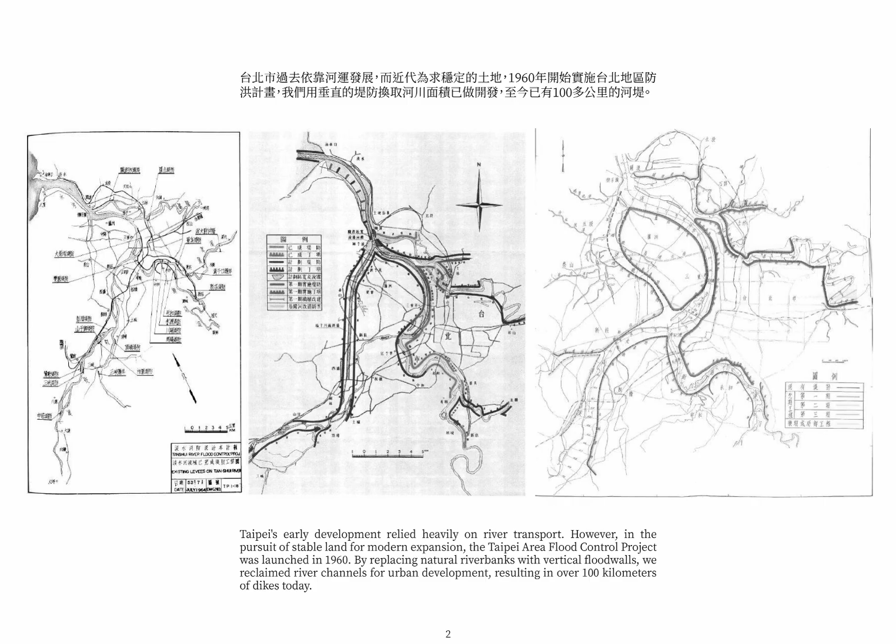Taipei once grew through river transport, but to ensure modern development, flood control plans were implemented, trading river space for land by building concrete walls. Today, these levees stretch for a continuous 100 kilometers. Tamed into mere infrastructure, the river has become the city's blue backdrop. Is it still a living, flowing body of water?

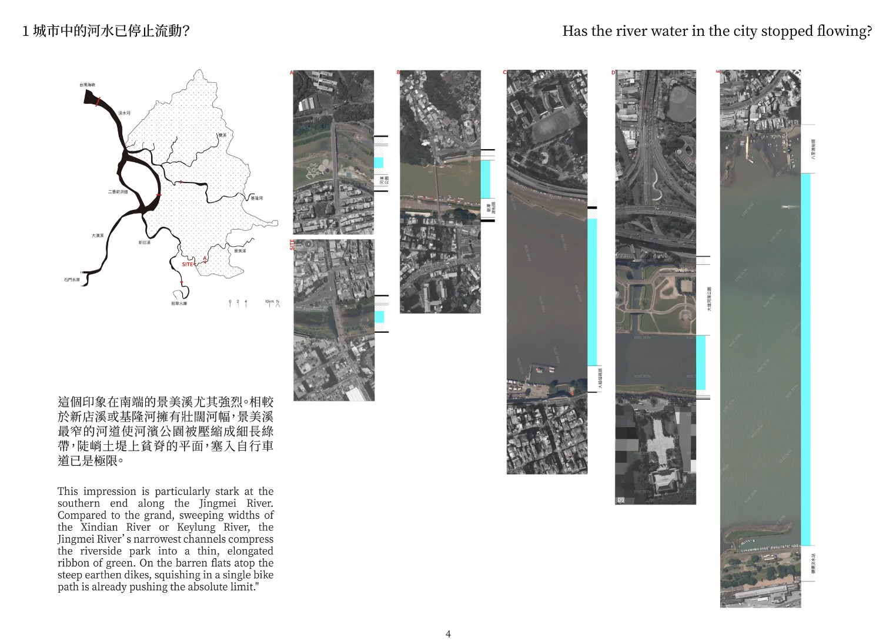This impression is especially sharp in southern Taipei, where a cycling path is forced along the narrow, steep edge of the river. Yet, because this is upstream, the river and community are small in scale. The dense floodgates and pumping stations amplify the structural volume, localizing a grand display of human power over nature.

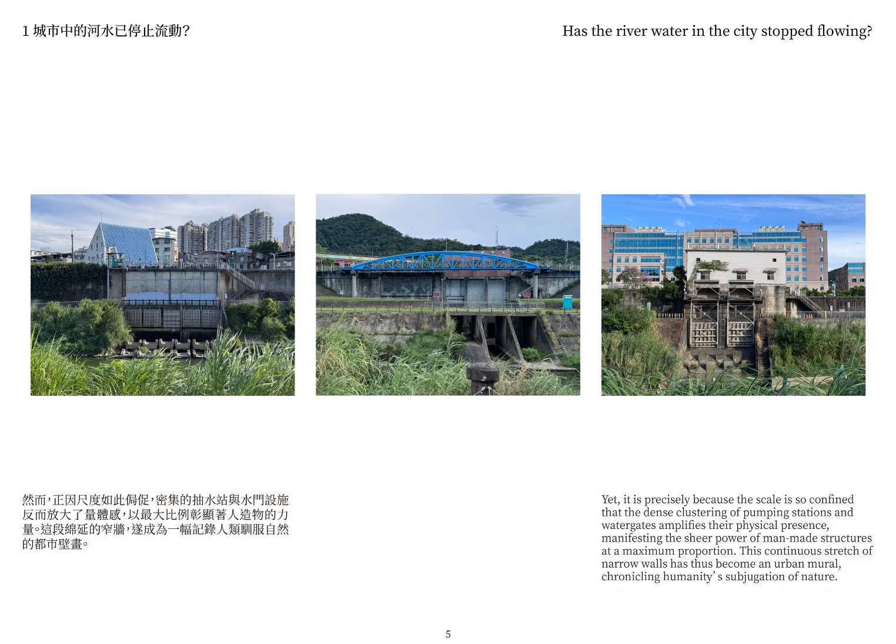They serve as openings in the high walls that separate city from river, yet they are also the most direct proof of how the city's water actually moves and breathes.

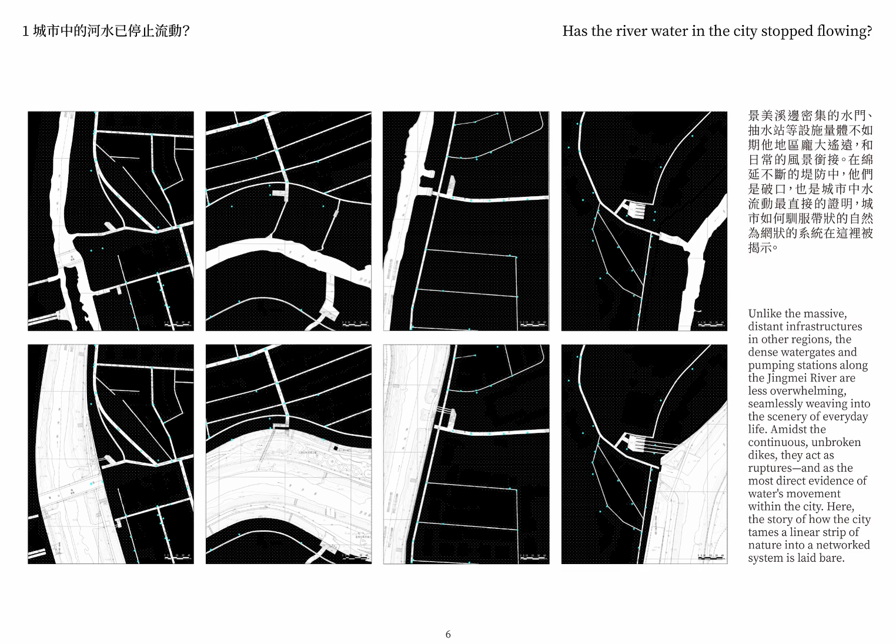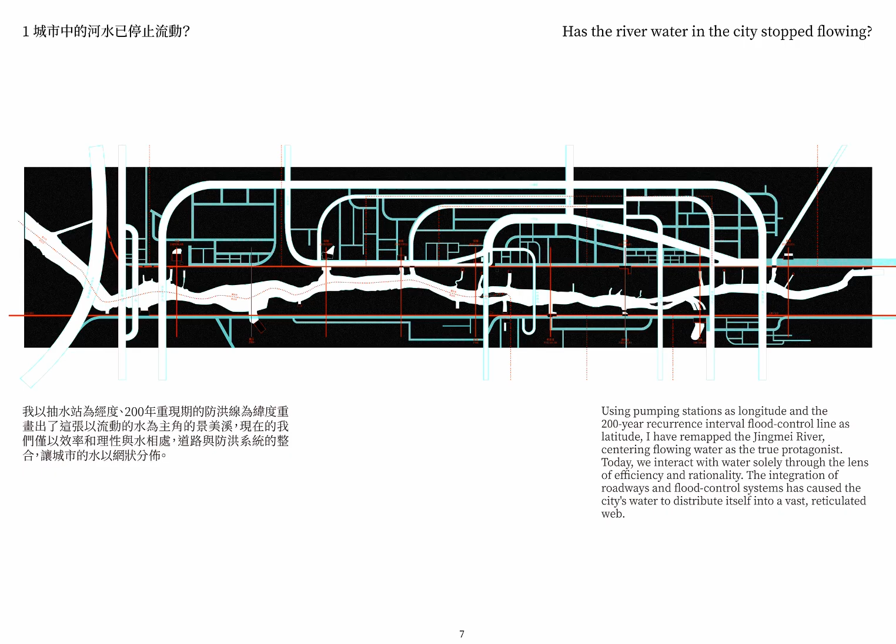Using water facilities as our new coordinates, I remapped the Jingmei River with flow as the main character. Today, we interact with water purely through the lens of reason, where roads and flood control systems intertwine. The city's water is no longer just a surface line, but a complex, interconnected web of processes.

Lifting our perspective to the Earth's surface, we see how temples that once protected this land used to face the river. After the levees were built, they retreated behind the flood defense lines, leaving behind rituals and daily life. My chosen site holds the protective measures of both eras.

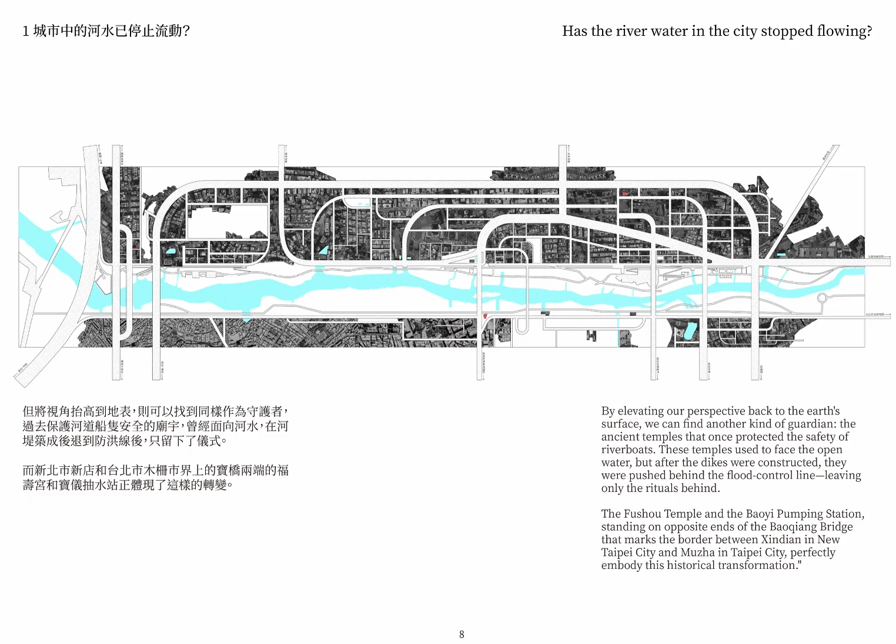The site bridges a residential area to the east and an industrial zone to the west. On the east, a pumping station is cut off from the community by a highway, leaving a void between the levee and the city. On the west sits another pumping station and an earth god temple.

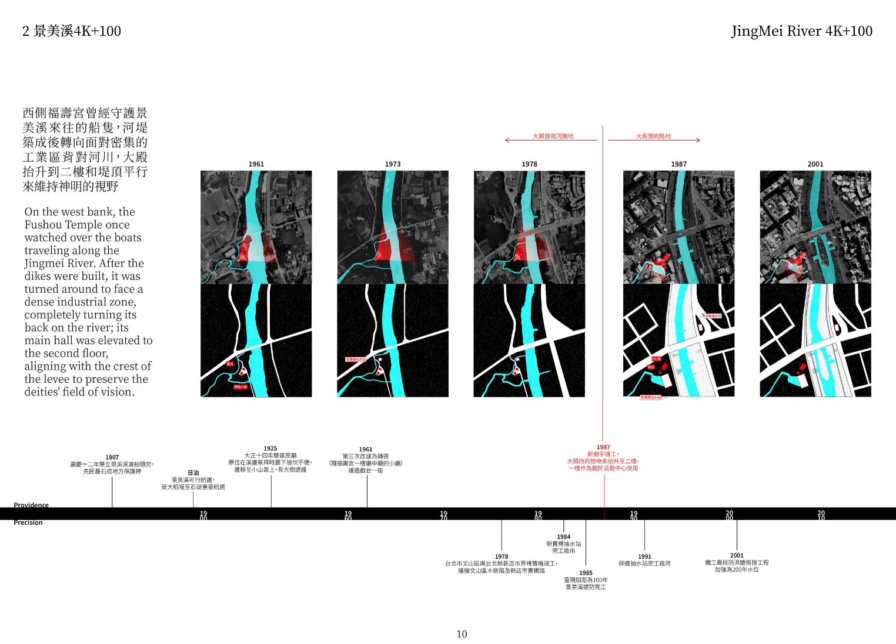The temple on the west once guarded passing boats and protected the land behind from floods, but after the concrete walls went up, it turned 180 degrees, turning its back on the river.

Across the city, riverbanks are treated exactly the same, regardless of location or width. On the steep embankment of my site, city roads, bike paths, and floodgates each occupy a single elevation, leaving our view forever trapped at the exact same height.

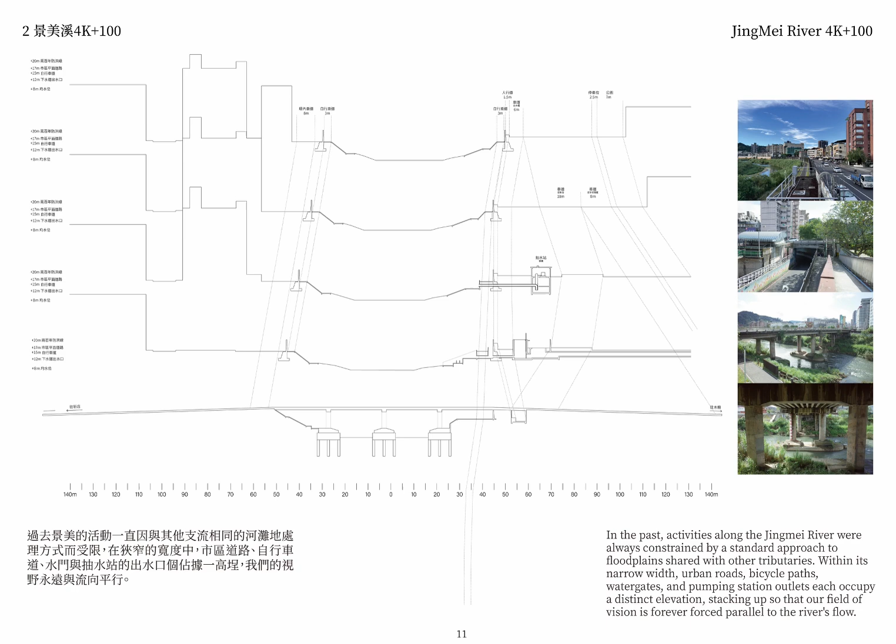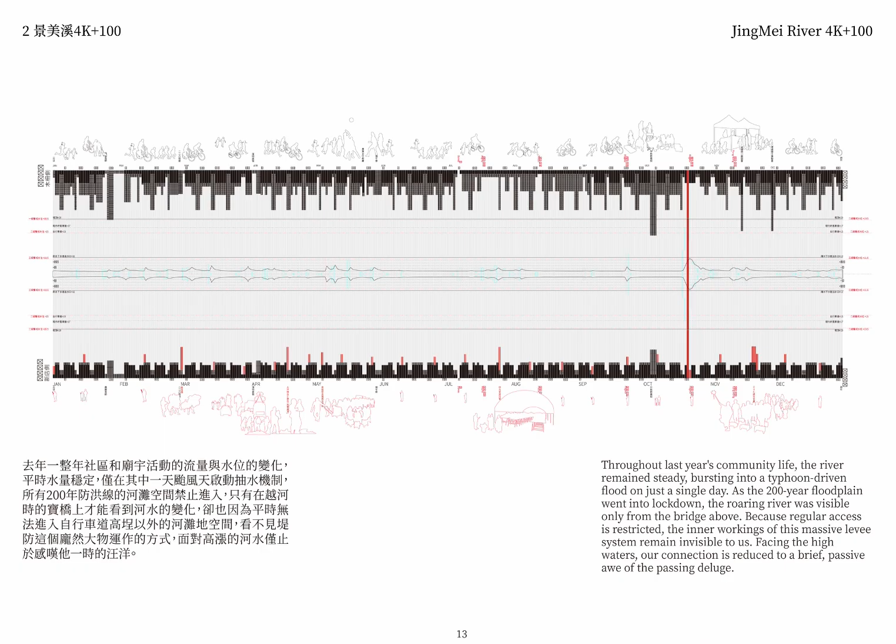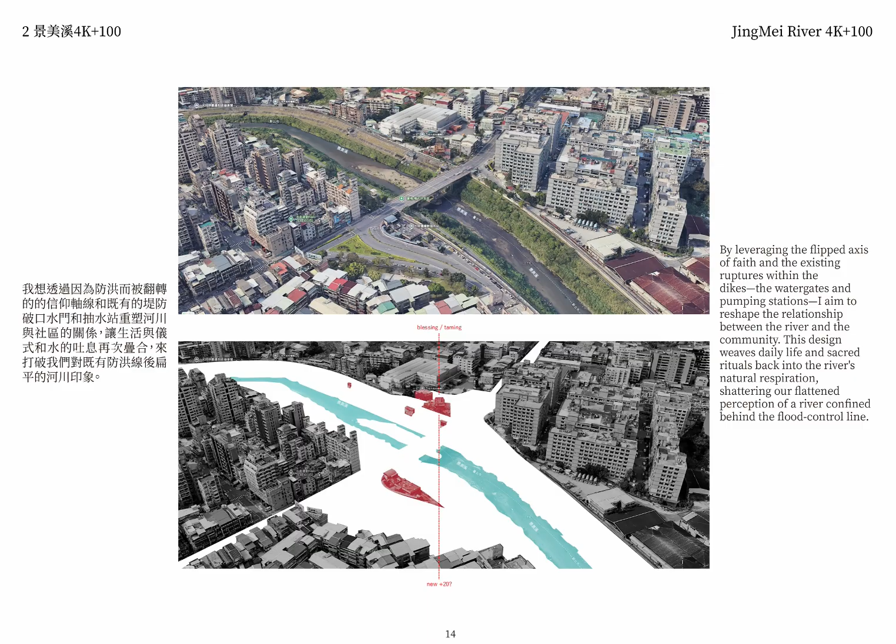By reshaping this existing sacred axis, I aim to shatter our flattened impression of the river trapped behind the flood defense line. It all begins with a fold in the existing flood control line.

By pushing back the flood defense line, I expanded the river's floodplain and reorganized the waterfront spaces and water facilities on both banks. This allows the flows of both water and human life to safely overlap in the same space.

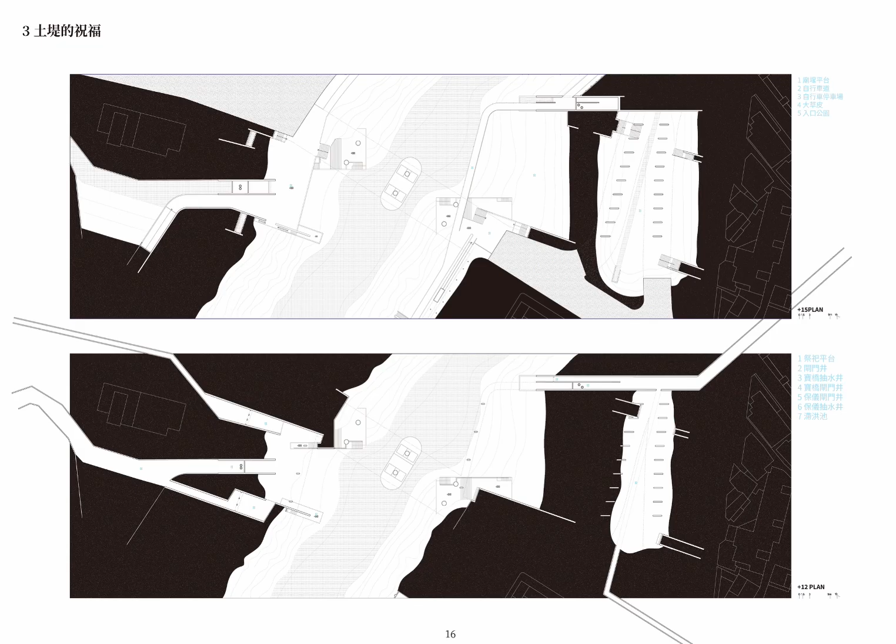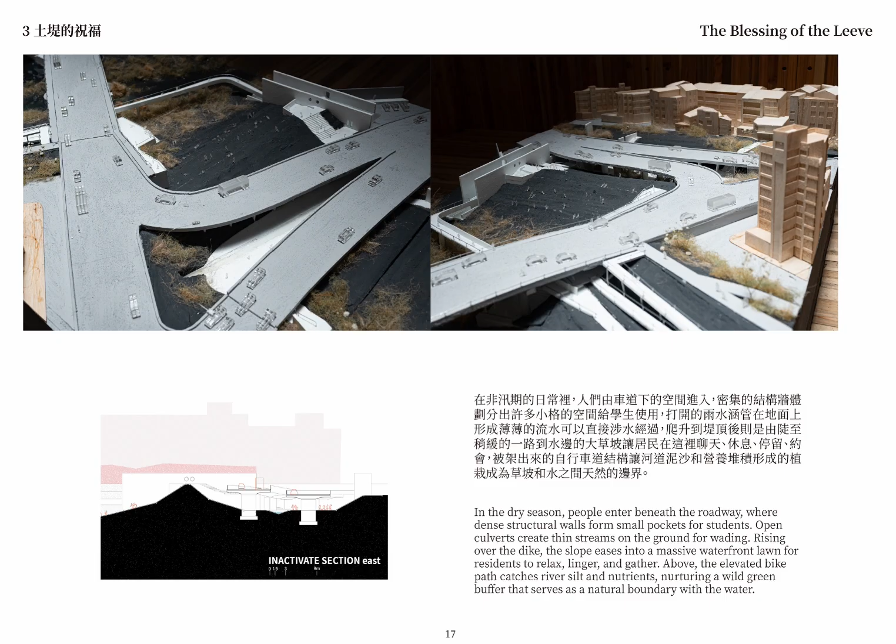East side during the dry season, people enter beneath the roadway, where dense walls form small spaces for students. Open culverts create thin streams for wading. Rising over the dike, a sweeping lawn invites residents to gather and relax. Along the water, the elevated bike path catches silt, nurturing a wild green buffer as a natural boundary.

In West Side, New Fushou Temple dominates the west bank, its grand plaza extending from the bike path's rhythm. In section, the pumping station is integrated beneath the temple's slope, while the nearby road dips before crossing the dike.

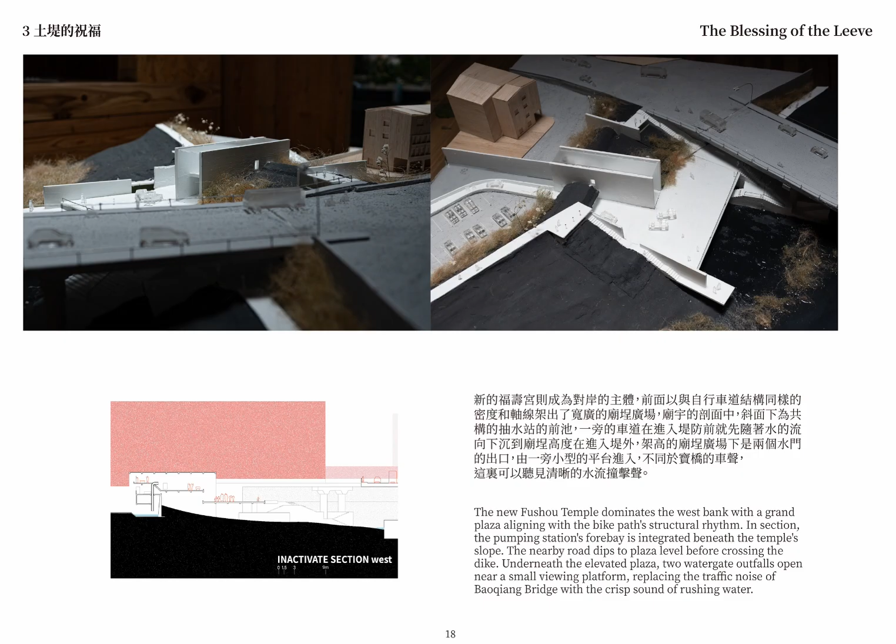Below the plaza, two watergate outfalls open near a small platform, replacing traffic noise with the crisp sound of rushing water.

During peak floods, water gates close and pumps activate. The sunken park turns into a detention basin, while the pump outlet doubles as a viewing platform, its tank overflowing down the grassy slope as a thin water curtain.

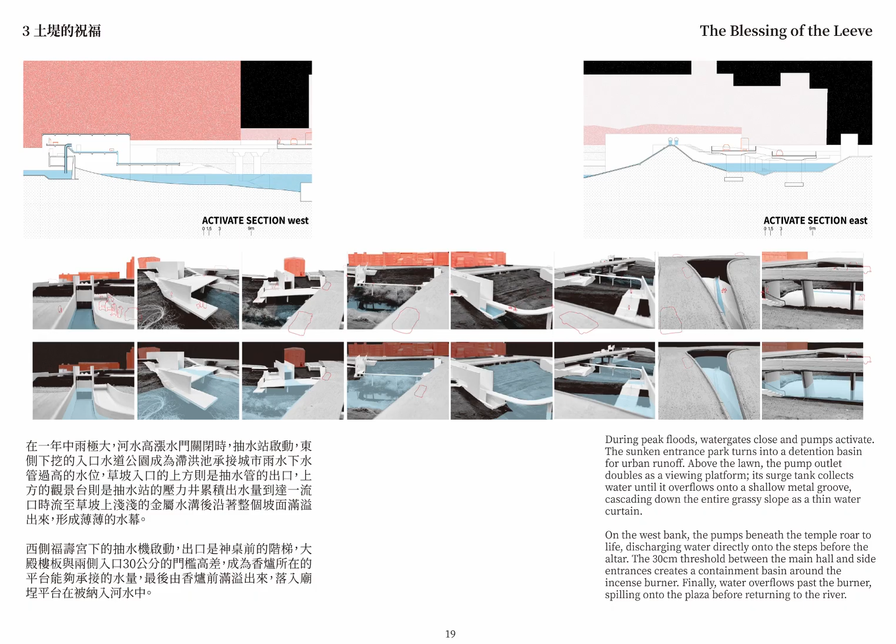On the west bank, pumps beneath the temple roar to life, discharging water onto the steps. The 30-centimeter threshold traps water around the incense burner before it spills onto the plaza and returns to the river.

This spectacle occurs only once a year when the pumps roar to life. Hidden from the city, this infrastructural theater is captured fully from the bridge, turning a mere crossing into the ultimate grandstand.

Here, the river's respiration weaves back into daily life, transforming the ordinary landscape into a performance that manifests the raw tension of hydrological flow.